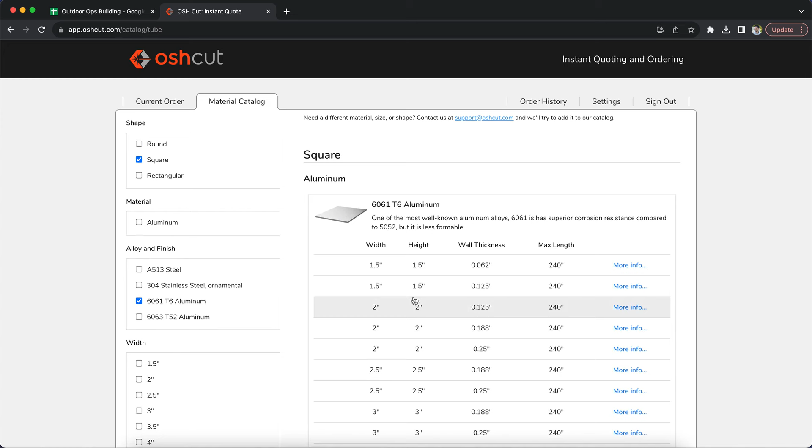I'm going to go down and we'll just pick this aluminum. I'm going to go with 1/8 inch, 1.5 by 1.5. And you'll see this is the profile, and right there below the profile picture there's download DXF. Let's go ahead and click on that. And then I'm going to jump us into Fusion 360, and obviously there's other software out there that you can use. This happens to be a pretty common one.

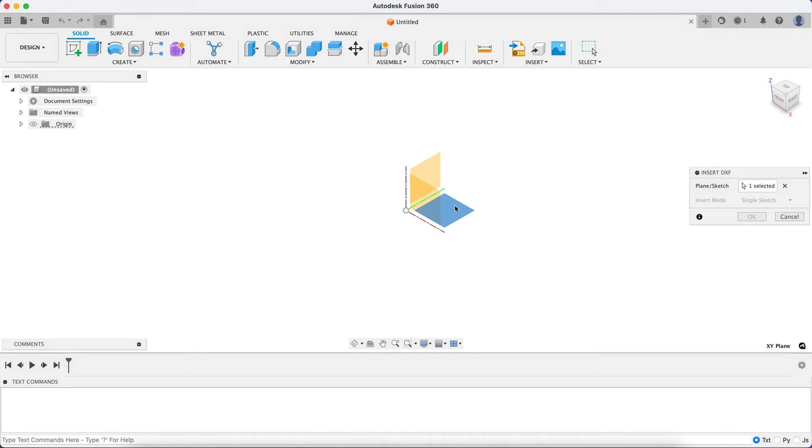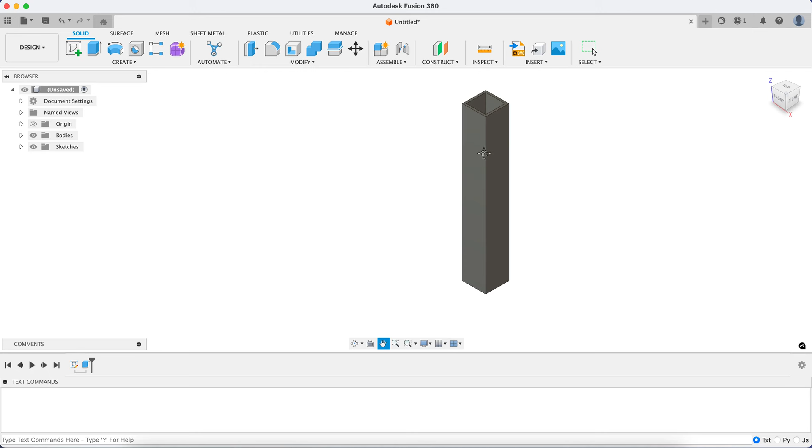I'm going to import this DXF file into Fusion, give it a second to load that in. And there's our profile. We'll say OK here. Select the contour that we actually want to use, and we'll go ahead and extrude that up. I'm just going to go 10 inches, so we'll just keep it simple. And there we have a tube that is 10 inches long of the profile that we had previously downloaded. Okay, so let's do something cool.

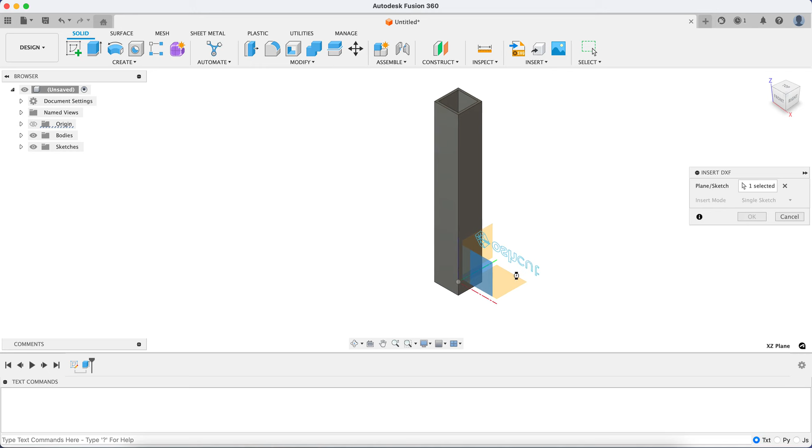We could cut an angle on this, we can do all that practical stuff, but I wanted to show you something unique that really only a laser can do well. And so we're going to do something kind of fun here. Insert a DXF again, and we'll grab a hold of this Oshcut logo. All right, there it pulls it in. We'll say OK. So there's our logo.

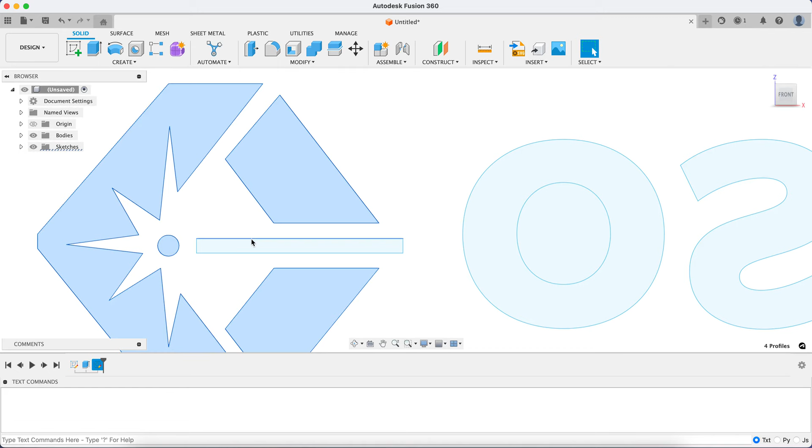So I'm going to go ahead and select all the profiles really fast that I want. We're going to extrude that logo. So I'm going to select all these profiles that I want to extrude. So not that center. Closer. Okay, so we got all the stuff we want. And then I'm just going to say extrude. Get a little better perspective here. And we'll just go 1 inch on that extrusion. Doesn't really matter.

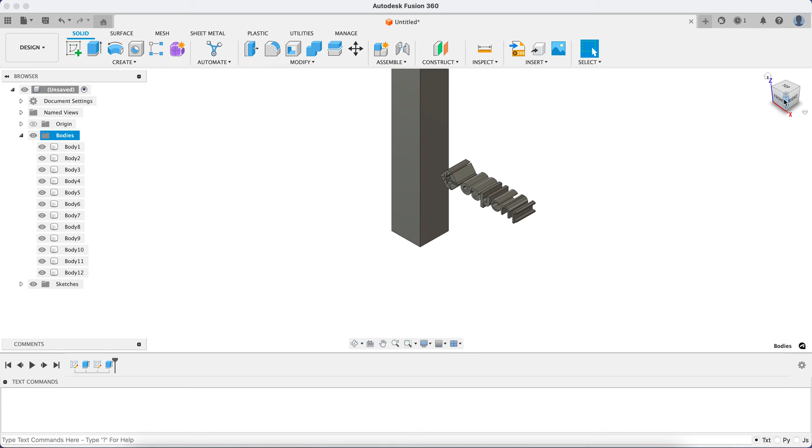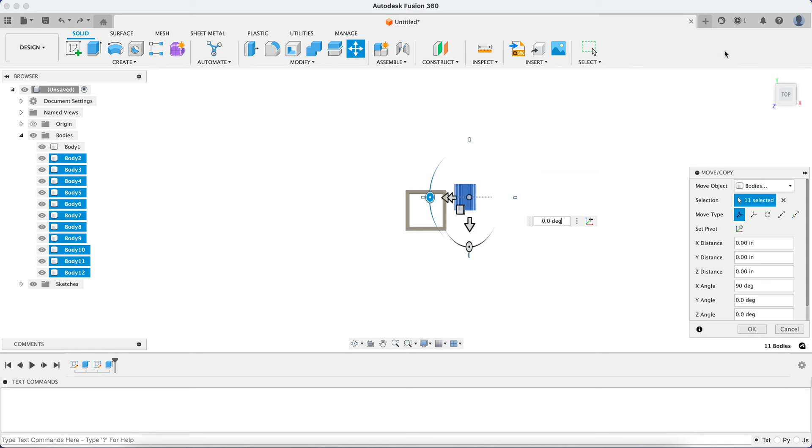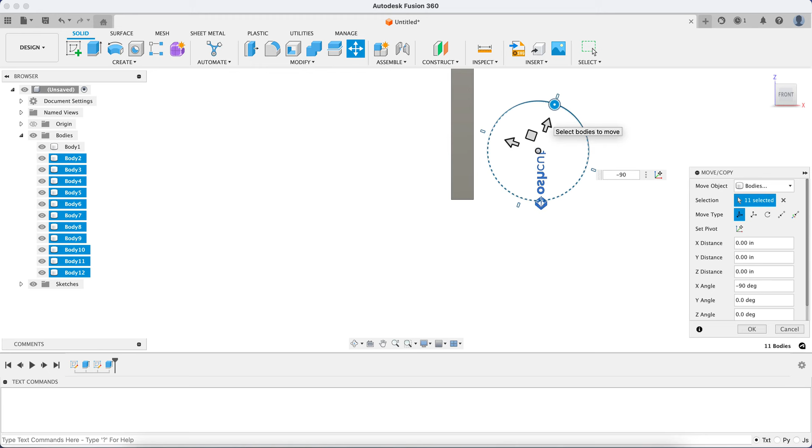Sometimes this thing, depending on what it grabs, will have a tendency to give you weird perspective angles. So you can see here I get funky angles on these. So do that. This top perspective, we want to rotate it another 180 degrees here, so we'll go ahead and do that. And then lastly, I want to position it.

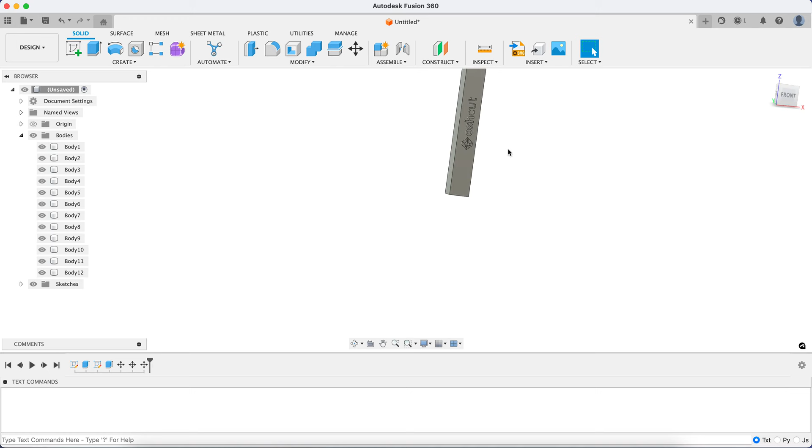So we'll grab this thing, throw it on here, and one last item is make sure we're just clearing that outer wall but not punching all the way through. So we'll say OK, and now you can see we have that logo inside of the tube there. So pretty simple. We're going to do a really simple cutting operation now.

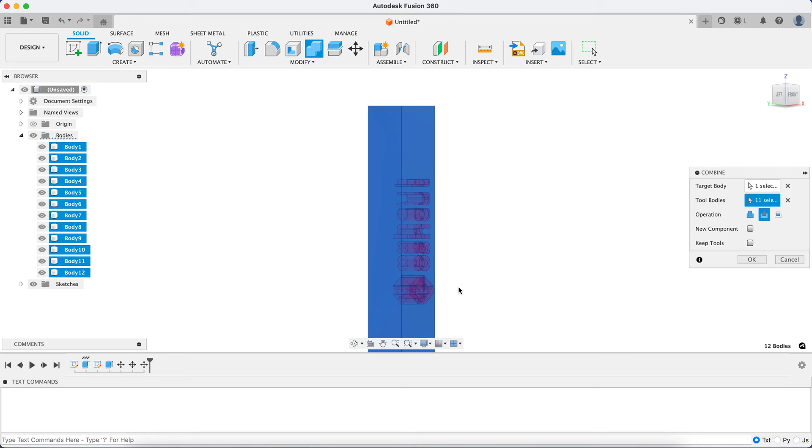So I'm going to select the first body that we made, our tube body, and hit the combine tool. In this combine tool, there's join, cut, intersect. We're going to choose cut. And then I'm going to select my tool bodies, all of these things. You can kind of see it showing us a preview here. It's a little hard to tell. I'm just going to say OK. All right. You can see that's cut right into the metal body of that tube. Pretty awesome.

Okay, so I want to show you one last step that is really critical to get done. If I export this right now, you'll notice on this bodies section, it actually will not upload and work correctly. And it's because there are multiple bodies now. The reason for that is the center of our O. That O is going to fall out, so it has created its own separate body for that O. So I actually need to get rid of that O.

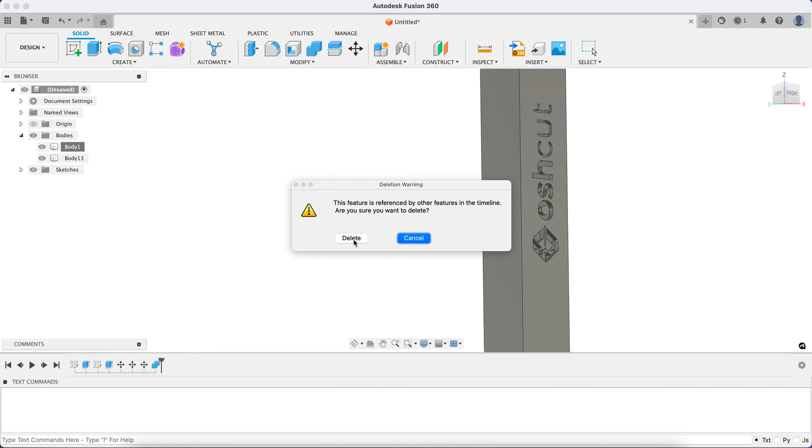So I can come in here and say delete. You notice if I delete it, it says some of these things are being used. If I delete it, it did some weird stuff. So let's not delete it. There's another option. If I click on the body and hit remove, that's going to remove it while preserving all those cut operations we just did. So I now have one body.

Let's go ahead and export this. We'll say export. Let's call this tube sample. I typically like to use STEP. You can use other formats, but STEP's a pretty good format and works well with OSH Cut systems. So from here, let's say upload. We'll grab that tube STEP file and let it work its magic for a second. And there you go. There's that piece of tube.

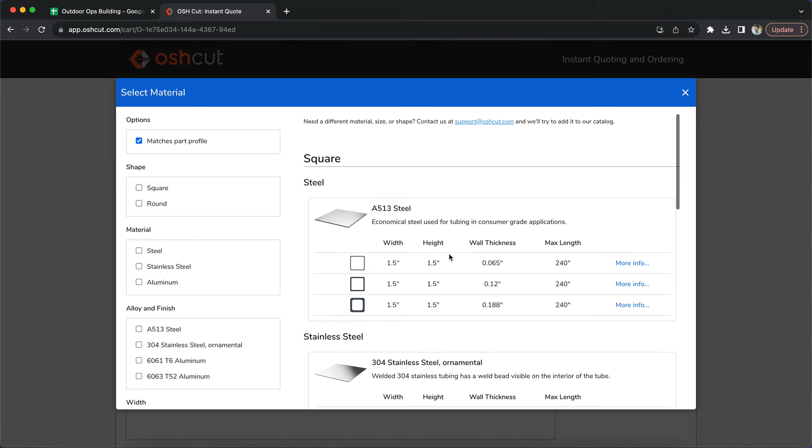I need to choose material now. And the cool part is that it knows it's 1.5 inches by 1.5 inches. But it's actually giving us some options. Do you want to use steel? Stainless? Aluminum? Now, we started with aluminum, so let's use what we started with, but you can see how awesome this would be. Now this may change the profile geometry, so it's something to be aware of.

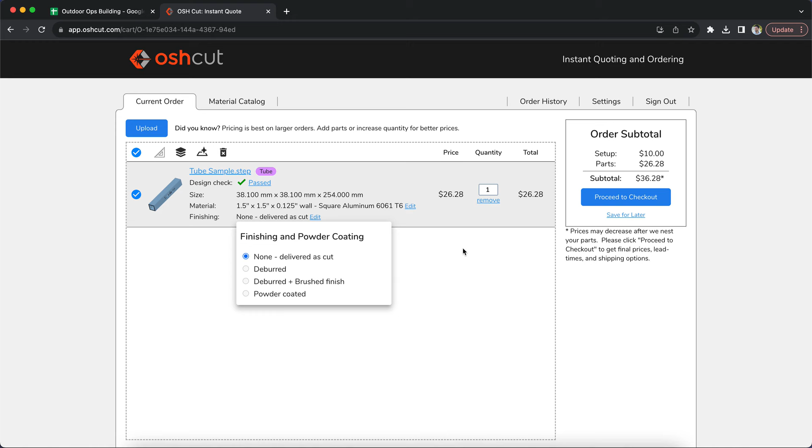So there's our aluminum price. We can add finishes to it as well, like we're used to with OSH Cut. We can also upload additional parts that are not tube to this order. So you don't have to just do purely tube. It can be tube plus flat sheet. And of course we have our quantity discount. If we're going to get 10 of these, you see we have some big savings. Anyway, that's tube. Super simple, amazing capabilities. Excited to see what you guys create with it.